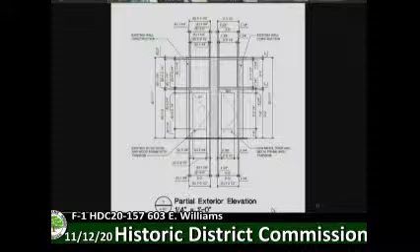Here's a 2-inch measurement here, not 1 3/4. But there's a ton of information on the doors if you want to take a look in the packet. New this evening, I have all of the packets open on my computer, so if you want me to point to anything during the discussion, just say, hey Jill, could you open up the packet for this item and show me that thing about the door hinges or whatever. I've got all four of them queued up.

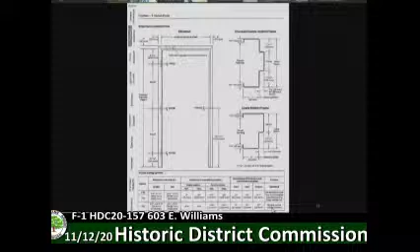I did note that the corners of buildings are an appropriate place to install blade signs of this sort. I would never encourage someone to install a sign this large in the middle of a building or mid-block. It's usually not appropriate, especially if there's other signage on the building. Since this is a corner building, if you guys think this sign is appropriate, that would be the place to put it.

From the Secretary of the Interior Standards, let me read number 1, which says that a property will be used as it was historically or be given a new use that requires minimal change to its distinctive materials, features, spaces, and spatial relationships.

Number 2 says the historic character of a property will be retained and preserved. The removal of distinctive materials or alteration of features, spaces, and spatial relationships that characterize a property will be avoided. There's number 1 again.

Number 6 says deteriorated historic features will be repaired rather than replaced. Where the severity of deterioration requires replacement of a distinctive feature, the new feature will match the old in design, color, texture, and where possible, materials. Replacement of missing features will be substantiated by documentary and physical evidence.

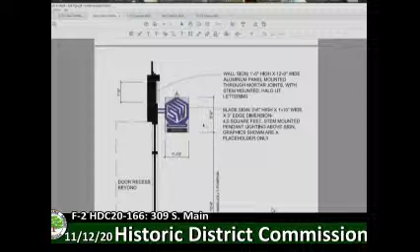The pedestrian sign is 1 foot 10 by 2 foot 6 by 3 inches along the edge. And the wall mounted sign is designed to fit within the band between the top of the storefront and below the stone course. It will be mounted through mortar joints in a way that will keep it off of the brick course so that it doesn't interfere with it.

It's pretty straightforward. Staff believes that the sign is appropriate, meets the Ann Arbor Historic District Design Guidelines, the Secretary of the Interior Standards, and the guidelines, which I'm going to jump back now to the PowerPoint to read to you.

All right, I have read number 2 and number 10 to you already. The Secretary of the Interior's guidelines for storefronts: it's not recommended to introduce a new design that's incompatible, or to use inappropriately scaled signs and logos or other types of signs that obscure, damage, or destroy character-defining features. I don't believe that this sign does that.

From the Ann Arbor Historic District Design Guidelines, it's appropriate to attach signage through masonry joints, not masonry units. Also appropriate to install signage that's subordinate to the overall building composition, and to mount signs to fit within existing architectural features, using the shape of the sign to help reinforce the horizontal lines of moldings and transoms seen along the street. It's also appropriate to light the signage from external light fixtures above or below the sign, and to place signs to align with others along the commercial block face.

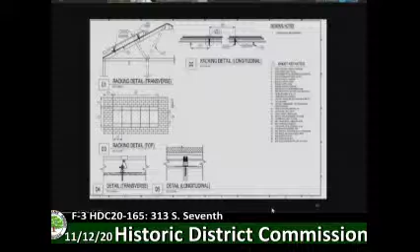There's a lot of information in the packet that I'm happy to pull up if anybody wants to see any of it, on connections and the racking detail, the panels themselves. I did not include all of that in here, but from the Secretary of the Interior standards, numbers 2, 9, and 10 best apply, and I've already read all of those to you.

From the Secretary of Interior guidelines for roofs, it's recommended to install mechanical and service equipment on the roof, such as air conditioning transformers or solar collectors when required for the new use, if they're inconspicuous from the public right-of-way.

The Ann Arbor Historic District Design Guidelines for solar panels say it's appropriate to mount solar panels at grade or on ground pole mountings. In the absence of an appropriate ground-based mounting location, panels should be mounted on side or rear facing roof surfaces. It's also appropriate to install mechanical and service equipment on the roof related to the solar units so that they are inconspicuous from the public right-of-way and do not damage or obscure character-defining features.

For sloped-roof installations, panels should be installed parallel to and within 8 inches of the roof surface, which this did adhere to. It's not appropriate to mount solar panels and their related devices on primary elevations or roofs that face the primary elevation, or in planes that are highly visible from the street view. This location has the highest impact on the historic character of the building, and all other options should be thoroughly explored.

All right, run back up here. I didn't have a whole lot in the way of staff findings. It's a total of 32 panels.

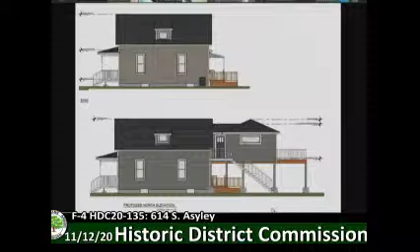I'll have to check and see if I have more design information on what that stair will look like. Once discussion starts, I will pull that up and show you.

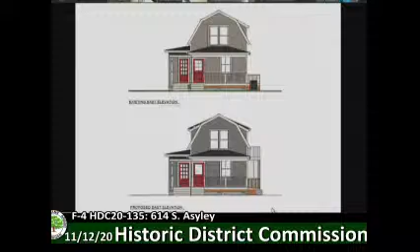This is the front. You can see there's an existing little dormer here, probably a bathroom on the second floor. The new work, which is a hipped roof, would sort of emulate that. Looking straight on from the front, it's a little bit higher than that existing dormer.

The design has a hip or pyramid roof on the back portion, connected with this lower section. The ridge here, the top of this roof, is a couple inches shorter than the ridge of the main house.

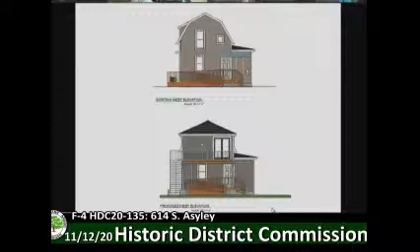So this project has a longer road ahead of it than most. Because it's zoned commercial, C2B, it will require a site plan. And because there's landscape buffer requirements that can't be met due to this shared driveway, it'll also have to get a zoning variance. The site plan will require 3 parking spaces.

So after the HDC, if the application is approved, they would need to go to the City Planning Commission next, and then the Zoning Board of Appeals for any landscape variances that are required, and then to City Council to get a site plan approved.

This application shows that asphalt all remaining. There's a good possibility the Planning Commission will insist that the bits that aren't being parked upon will be removed, but that's good, that's desirable. Should that happen, it wouldn't require a petition to come back to you guys to remove non-original asphalt. And there's a strange brick strip back here.

I have no idea why. And there's a fence dividing the property at the back here.

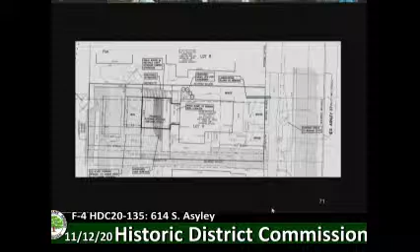Just want to point out that the house currently has no post-1944 additions. Everything you see is the original mass of the house. It is 924 square feet on a 564 square foot foundation. The application proposes to add to the footprint of the building by 51% and the floor area by 31%.

So from the Secretary of Interior's standards, once again, numbers 2, 9, and 10 are the most applicable, and I have read those to you.

From the guidelines for additions, it's recommended to construct a new addition so that there's the least possible loss of historic materials, so that character-defining features are not obscured, damaged, or destroyed. Also, to locate the attached exterior addition at the rear or on an inconspicuous side of a historic building, limiting its size and scale, and designing new additions in a manner that makes clear what is historic and what is new.

Also recommended is considering the attached exterior addition both in terms of the new use and the appearance of other buildings in the historic district or neighborhood. Design for the new work may be contemporary or may reference design motifs from the historic building. It's not recommended to design a new addition so that its size and scale in relation to the historic building are out of proportion, thus diminishing the historic character.

From the Ann Arbor Historic District Design Guidelines for all additions, it's appropriate to locate a rear addition on the least character-defining elevation and keep it subordinate in volume to the historic building, and to place a new addition on a non-character-defining or inconspicuous elevation, limiting the size and scale in relation to the historic property. It's also appropriate to separate a larger addition from the primary historic structure and link it with a smaller connecting structure, which is what this does, and to place new walls in a different plane from the historic structure in a subordinate position to the historic fabric, which this also accomplishes quite nicely.

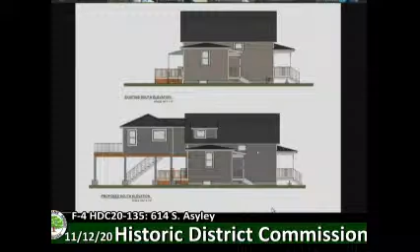That, I believe, concludes staff's comments.

The character defining features of this house are on the 1.5-story main block, and none of the existing visible features would be changed or compromised. The new addition will be moderately visible from the sidewalk. The height of the addition is appropriate, and staff believes the work meets the standards and guidelines. It's a little unusual to have just a second floor addition, but I do think it works okay.

Okay, Commissioners Beeson and Epperson were on the review committee. Would you please give us your report and recommendation?

Sure, I agree with Ms. Thacher's report. I think overall this application fits within the guidelines. As stated, the unusual nature is just the second floor addition itself, which may initially seem to throw off the massing and scale a little, but I think it's actually really light in how it touches the existing structure and doesn't modify it much, especially regarding the character defining features. The dormer to be installed on the opposite roof on the driveway side is set further back from the rear of the house, which I think is appropriate, and actually helps conceal the rest of the addition and its roof structure a little.